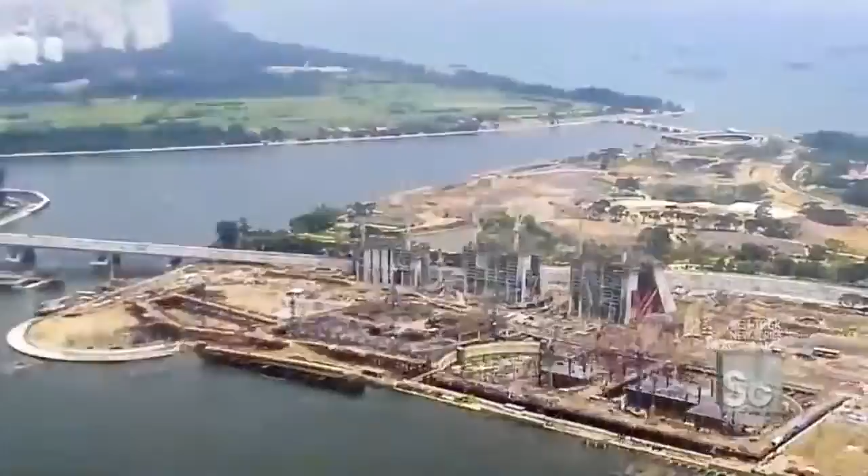With no natural resources of its own, Singapore is risking $5.5 billion in hopes of cashing in on the gambling boom exploding across Asia. It's a pretty significant gamble because for Singapore, you've never had gaming before at this scale. You've never had a resort at this scale. Yes. You're taking a kind of a major leap. Yes, it's certainly a transformational project for Singapore. Where you hope to actually not just double, but triple the tourism receipts. That's big.

The centerpiece of this giant transformation, the Marina Bay Sands. One of the biggest and most expensive casino complexes in the world. Unlike any hotel and casino ever built. Rather than just being kind of a traditional hotel and casino that we might find in Vegas, instead, we have a museum, you have theaters, you have retail, you have a casino, massive convention center, 3 incredible hotels, and all of that capped by the first ever Sky Park. That is absolutely right. The Sky Park on the very top will become the icon of Singapore, we think.

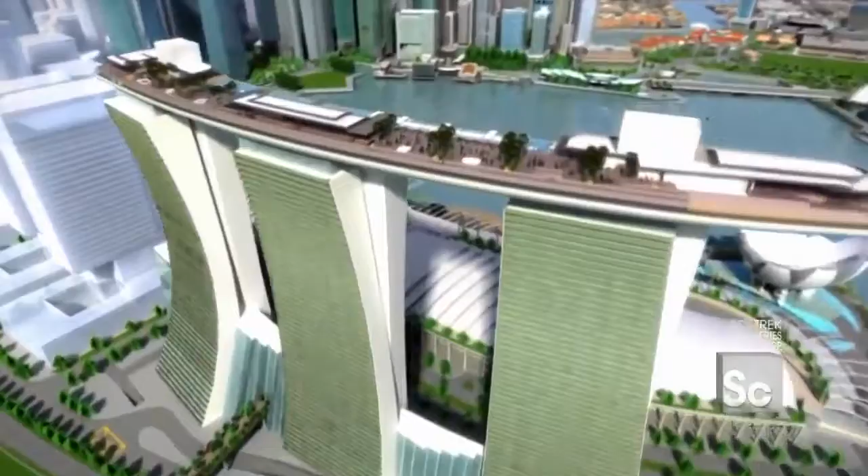In a move that has never been done before, world-famous architect Moshe Safdie put a park across the top of 3 massive skyscrapers. An 1,100-foot-long urban oasis with tropical gardens and one of the longest swimming pools on Earth. All of it perched 55 stories above the ground.

So, Brendan, how do you describe a Sky Park to people? I mean, it's just a fantastic structure. I've never seen anything like it. There's 3 55-story towers, and you're putting a piece of steelwork the size of an aircraft carrier on top of it. So it's quite a feat. And there's a park up there. There is. Well, there's more than that. There's observation decks and swimming pools and restaurants and all sorts of things. So it'll be a little city in itself.

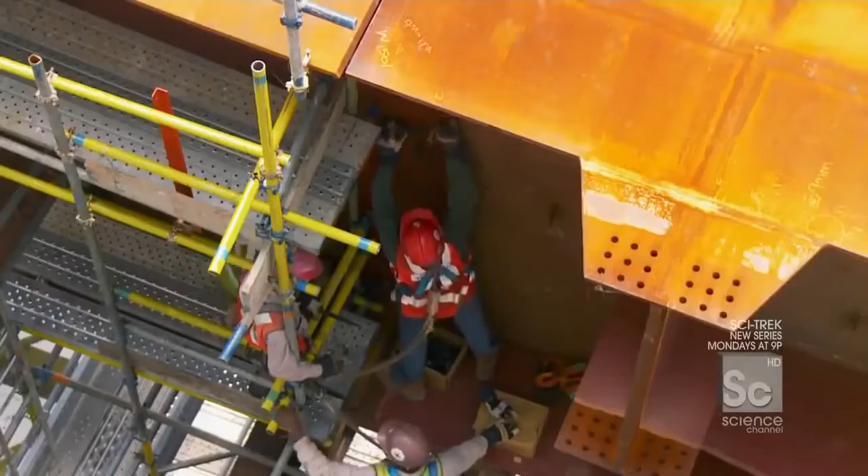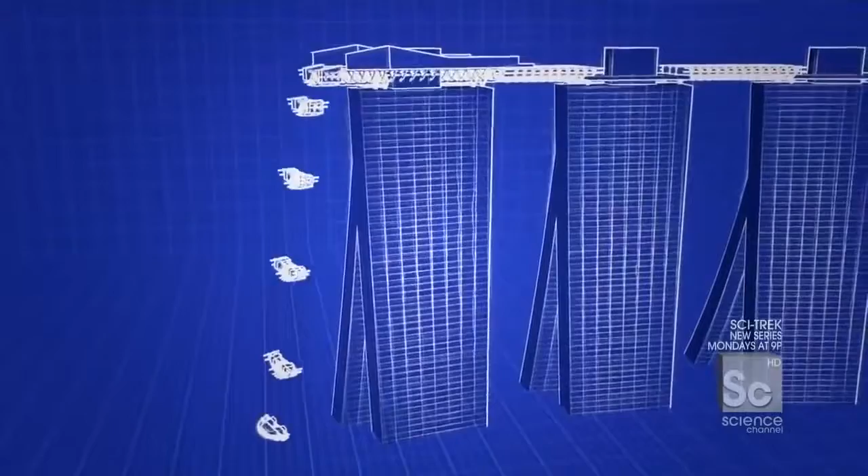The biggest challenge for builders, lifting 7,000 tons of steel, which is more than the main span of the Brooklyn Bridge, on top of 3 650-foot-tall buildings. To get it up there, the team divided the structure into 14 large but more manageable segments. 6 form the bridges connecting the towers, and the other 8 make up the observation deck, which sticks out 218 feet from the end. And right now, crews are about to lift the second-to-last bridge segment, a massive 350-ton piece that will hang between towers 2 and 3.

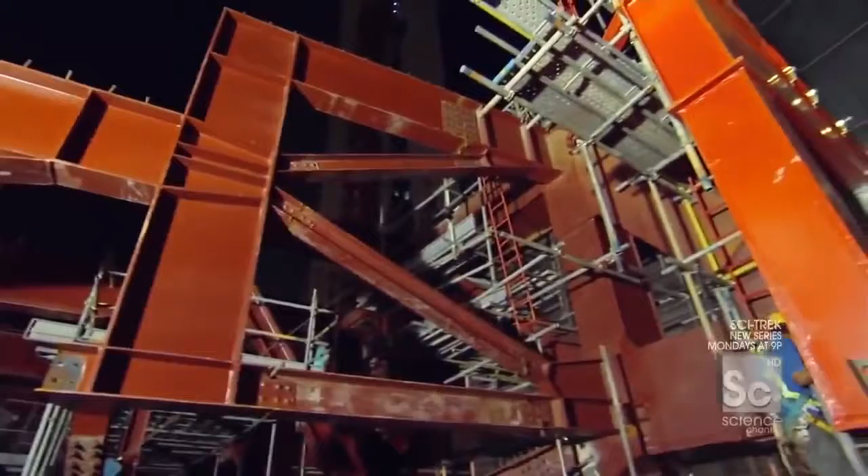It's a little after 7 p.m., and on most job sites, it'd be quitting time, right? Folks would be going home. But here in Singapore, we're about to begin one of the most critical lifts in the entire project. That bridge segment right there, an over 350-ton chunk of steel, is about to get lifted up over 650 feet in the air.

I mean, in principle, this sounds crazy, right? Yes. We're actually taking a bridge, lifting it up, and putting it on top of 2 skyscrapers. Yes. This has never been done. Never done. So you got to be a little bit nervous to get this thing up. Oh, definitely. We have to get it right. Lifting this piece will take some of the strongest hoisting cables ever designed. Going up? All right, Solomon, up here? Yep. They get attached to the very top of the segment, 5 stories up.

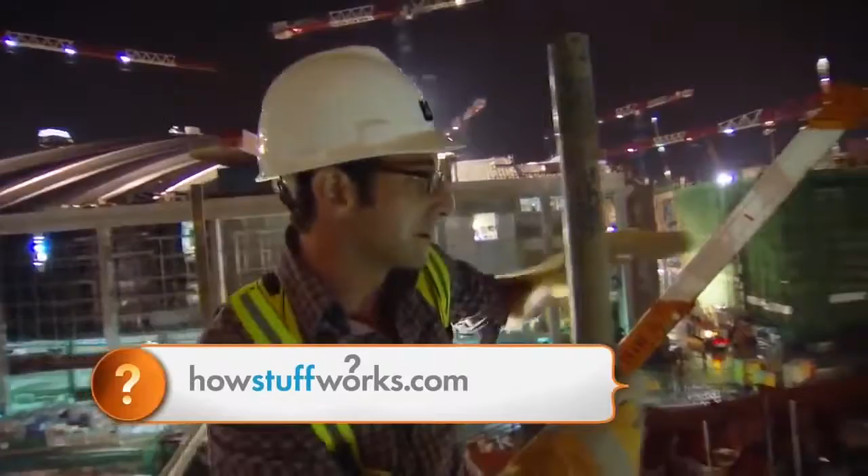All right. And now, at long last, I'm on the top of the whole bridge segment, and you really get a sense of its length, because look at that. It spans all the way out between 2 full towers, over 150 feet long. And here, this is what it's all about. This is the shackle coming down over 600 feet up. And to really get that point, come here, check this out. Look at the amount of bound cables inside of this thing. Just the density. It's two of these shackles, one on this side, one on that side. We're gonna lift up over 350 tons of steel.

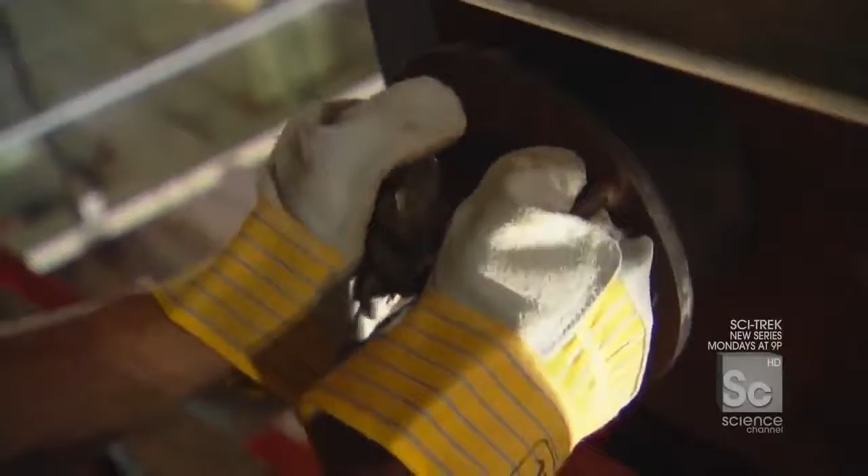All right, you call the man upstairs. An operator from the top of the sky park lowers the shackle down. Here she comes, here it is, here it is. Okay, 960 mm. It has to line up within 1/10 of an inch for this 150-pound anchor pin to fit through. Oh no. I'm stuck. Push. Fight, come on, shake it a little bit. Hammer! Give it to me, Poppy. Lock here. You ready? Here I come.

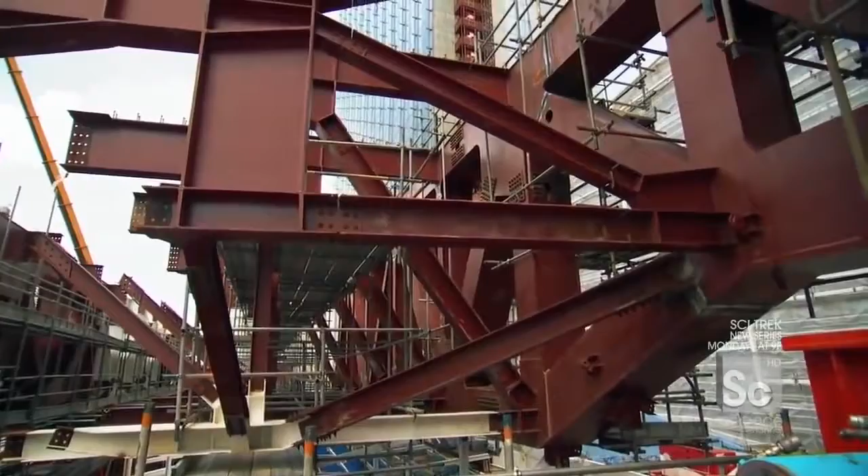Once the pins are pounded into place and the shackles are connected, there is one final step to make sure that the load is secure. Woo! Overnight, crews test the connections for 12 hours by hanging the segment just 4 inches above the support. If everything looks good, it is ready to go up. Okay, Solomon, she's floating. Yes. 4 inches off the ground. Ready for the lift? Yes.

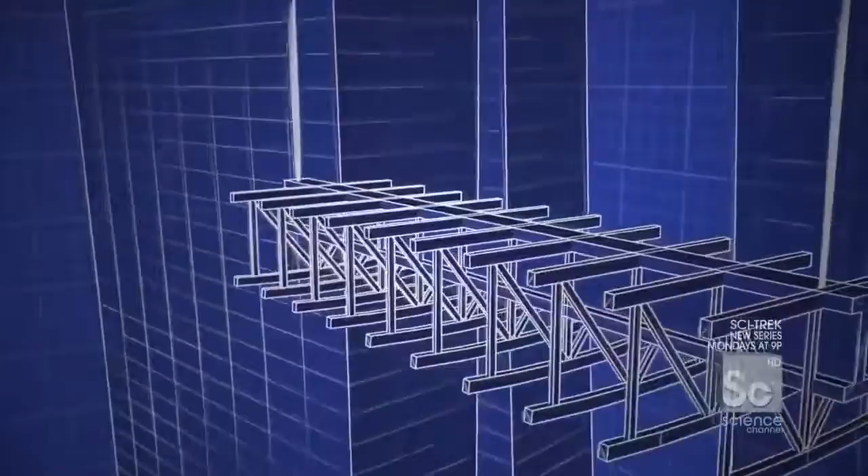How's the wind? If you can see, it is swinging. And if it swings, it might hit the building. So when the lift begins, the concern is in a strong wind, like a pendulum, it could move and actually hit the building. Yes. It's that close to the building? It is very close to the building. Because of the curvature of the towers, this piece must pass within 10 feet of 2 glass skyscrapers on its way up. Any wind over 5 miles per hour is enough to call off the lift. So are we good? Are we ready? Yeah, good. So it's now okay to go.

Okay, I'm ready. Typically, crews would use tower cranes for heavy lifts, but this segment far exceeds their capacity. So instead, engineers are borrowing the technology from a different kind of construction: bridge building. Even the most powerful tower crane can lift about 20 tons. This thing weighs over 360, not an option. So they went with something called a strand jack. And to understand how it works, imagine 2 hands or clamps holding a rope. One hand locks the rope, the other brings the rope up, grabs the rope, goes back for more, brings up more rope, and so on and so forth.

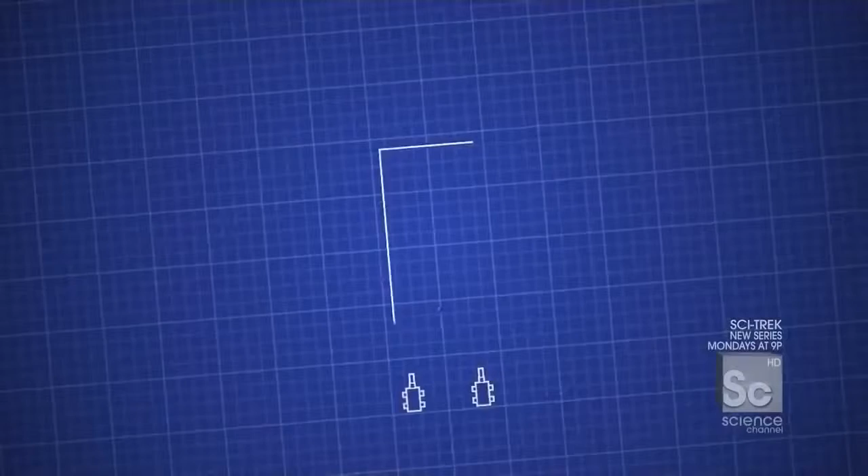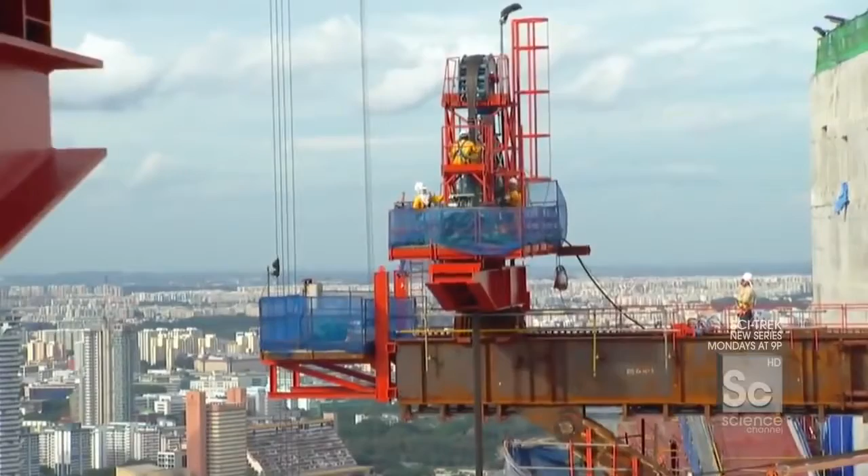Strand jacks work on simple hydraulics. A bundle of 22 half-inch diameter cables passes through 2 clamps. The top clamp grips the strands and moves up almost 2 feet. Then, the bottom clamp locks the cables in place while the top moves back down for the next pull-up. It takes 2 enormous strand jacks to lift this segment, one on each tower. Combined, they could lift the Statue of Liberty. It's the first time that this technology has been used to make lifts this heavy from the top of a skyscraper.

Tony? Danny. Welcome, Danny. Good to meet you. Good to meet you.

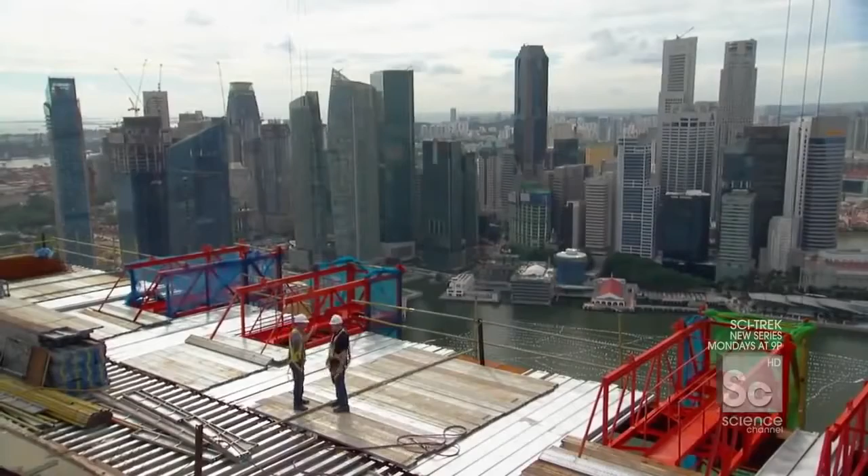Tony, where am I standing right now? Well, you're on the Sky Park. So this is kind of where the action is. This is where the pool is. Yep. Right where we are now is the second swimming pool. We're actually in the pool right now. We're in the pool. This is the view from the pool. Oh my God. People will be able to swim out to the edge of the pool. Yep. And literally, there'll be no edge, right? It'll be an infinity edge. It'll be an infinity edge looking out over Singapore. Wow. It's pretty spectacular. That is amazing.

And what's making all of this happen is this really just nasty looking beam. That's right. So this enormous frame is supporting the strand jacking units. Now, can we actually head up top to the strand jack? Yeah, we can. Let's go this way. The strand jack sits on a temporary support structure that extends 30 feet out from the side of the tower. Tony, where we're walking right now, we're actually leaving the skyscraper below us and now heading out. We've just walked off the edge of the building. Beyond. So we're now standing perched out. There's no more skyscraper below us right now. There's no building below us.

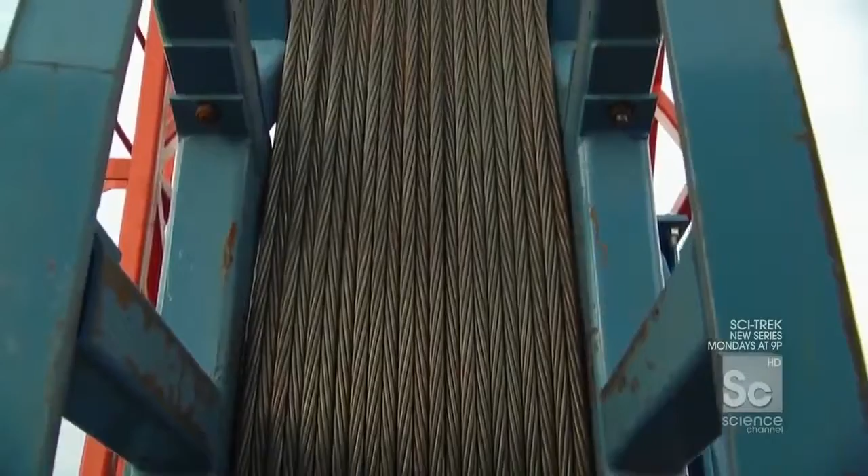It's awkward. It takes almost 30,000 feet of cables to raise the segment, enough to cross the width of Manhattan. And if any of them get tangled, workers cannot lower the piece back down. So one of the most critical jobs on the site falls to the cable manning crew here at the highest point of the sky park.

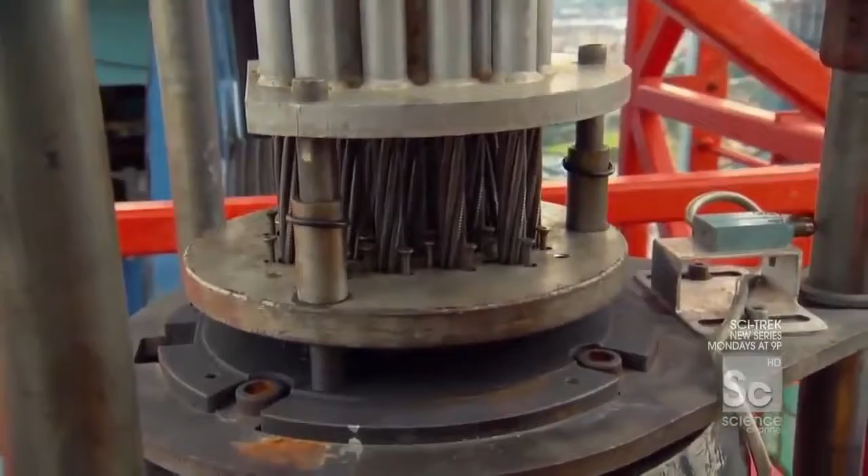Okay, so I am now standing at the very top of the strand jack. And you know that because right here, this is it. This is the top of the cables. And what we're about to do, every 30 strokes, they stop everything, clamp the lift, and spray some lubricant inside to make sure everything moves real freely. Unfortunately, I'm getting tasked with that role right now, so what do you got, some WD-40 we're doing this with? Look at this guy. Why is this the most low-tech thing in the world?

Okay, so now what we've done is we've taken the collar off, we've lowered the jack down, now we've exposed the cables to give us good access for some good greasing. Okay, Romley, how do you grease it up? Spray and pull out. Put in, spray, pull out. Go in, spray, pull out.

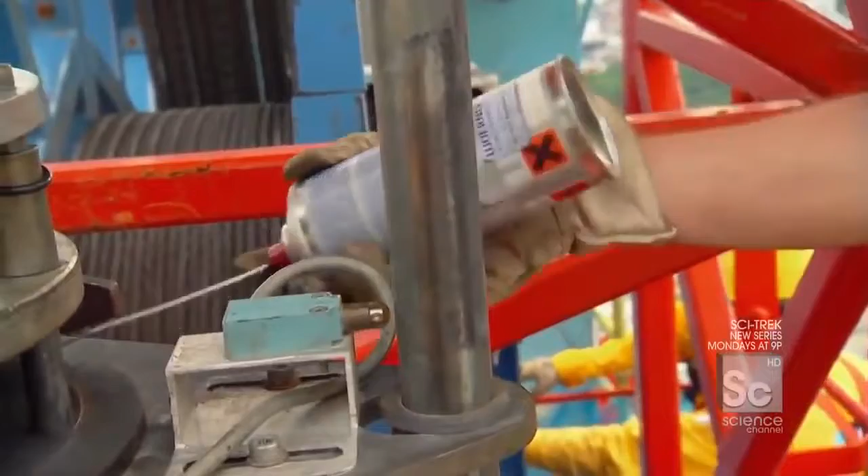You know, it's sort of humbling to have to climb up to this point, to have that behind you, to have to take a spray can like this, stick in, spray, pull out. Stick in, spray, pull out. These guys have to grease these cables once every hour for the entire night to get this segment up the final 500 feet to the very top of the Sky Park.

Coming up, a one-of-a-kind solution to fight Singapore's intense sun puts up a fight of its own. Hang on. Whoa. I'm gonna pull you right outside of the basket.

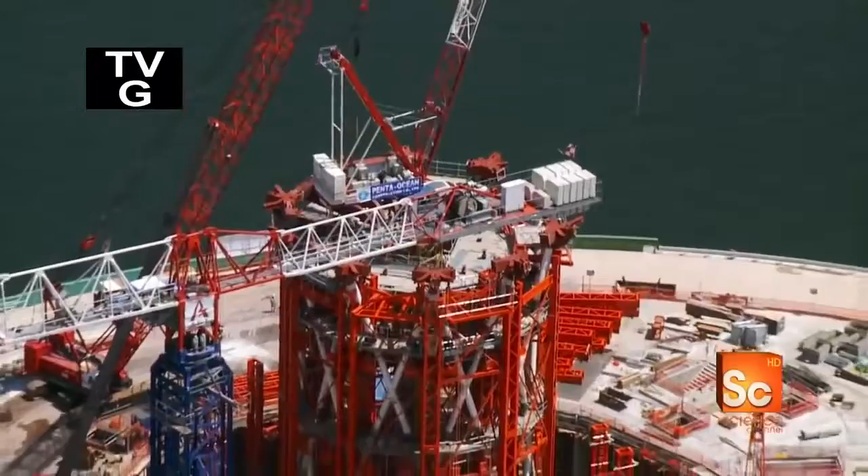Singapore is just 14 miles long. And with literally nowhere else to expand, this tiny island is increasing its footprint by actually filling in the sea, creating almost 1,000 acres of land on which to build an entirely new downtown.

So tell me something. If I were standing here 5 years ago, what would I have seen there? Well, 5 years ago, you wouldn't see the floating gallery, you wouldn't see the wheel, you wouldn't see Marina Bay Sands, neither would you see the financial center. So this is a radically different skyline in just 5 years' time.

Yes. Singapore's evolution involved 30 years of land reclamation, followed by 5 years of construction, all culminating with the Marina Bay Sands. So 5 years ago, this would have been called the old downtown of Singapore. Yeah. And now with the Marina Bay Sands completed, this becomes the new downtown. Yes, absolutely.

The Marina Bay Sands' 3 hotel towers will offer guests phenomenal views of Singapore's new downtown. But they also had to be a stunning centerpiece for the city's redevelopment. So, to define their curved silhouette, the architect clad the tower facades with 1,900 glass fins, which also perform a key functional role for the building.

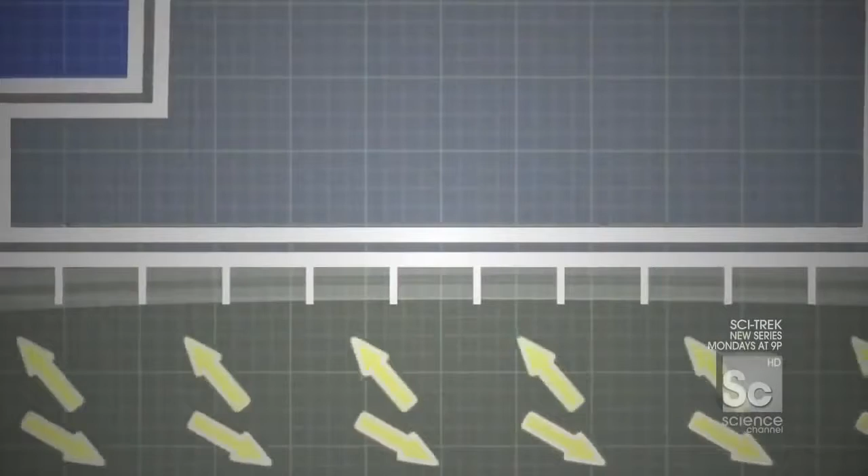The western face of the towers gets the most intense afternoon sun, so when the light hits the fins, they actually deflect the sun's rays, casting a shadow that reduces the heat on the hotel rooms by 20%, while still enabling clear views of the bay. But this distinctive design feature is also one of the most difficult to install.

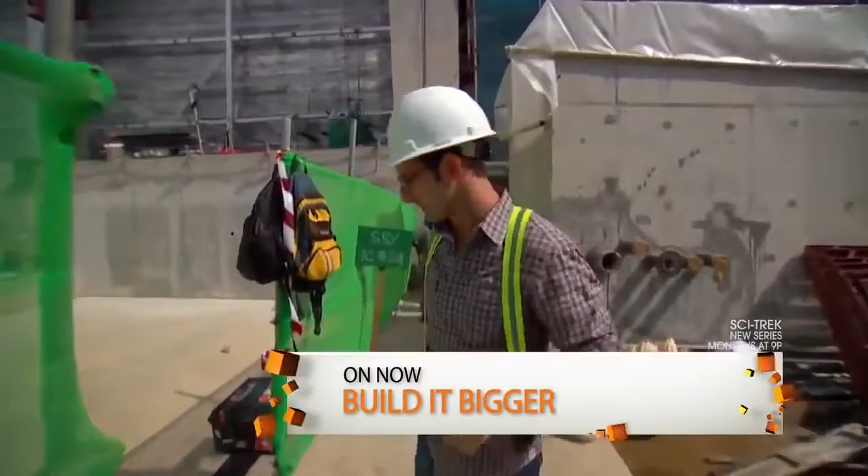I think today is gonna be one of those days where I go and do something that I kind of think I shouldn't do, but in the name of really understanding how it is they build this building, we're gonna do it anyway. I'm gonna take you in a gondola up the side of a building, almost 600 feet, to install glass fins. And the guys who are gonna help me do it are right here.

Terry? Hi, Danny. Good to see you. David, how are you? Danny, good. Not bad. What are we up to, fellas? We're actually going up to the top. Basically, we're going to install the last fins to Tower 1. And these fins are actually hanging perpendicular from the facade of the building.

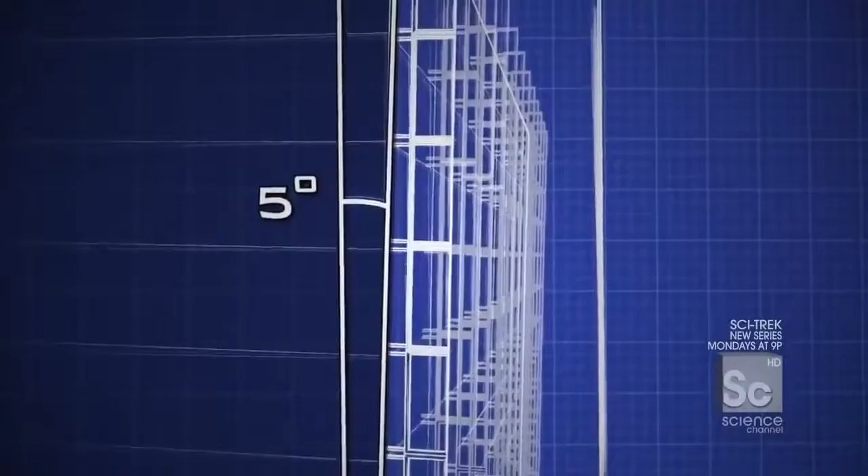That's correct. Each fin is 10 feet tall and weighs 400 pounds. They're hung in straight vertical lines, protruding up to 4 feet from the side of the tower. Because the facade actually curves outward 5 degrees at the top, there would not be enough clearance for the Sky Park lift to pass by. So 12 fins in the upper corners of each tower were left off until now.

So this is it. We are closing up the curtain wall of Tower 1. Yes. Big milestone. Big milestone. All right. Take me over to my maker. Let's do this. Okay, no problem. Lead the way.

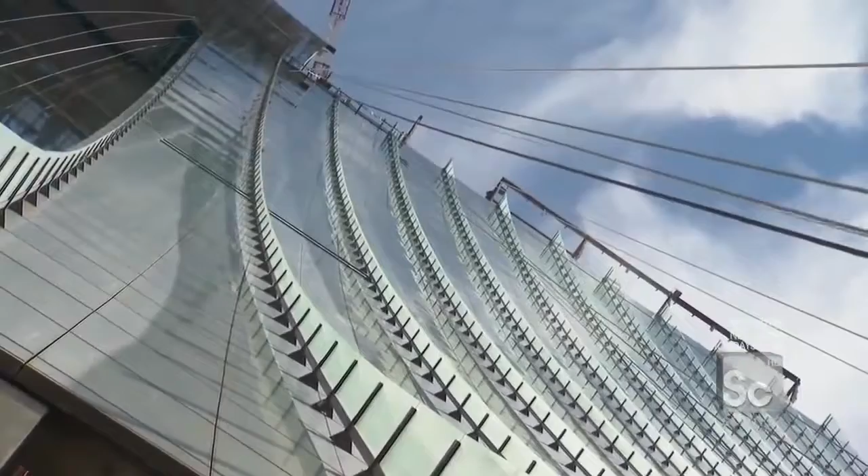Terry's crew installed the fins from a 6-foot-long gondola hanging off the side of the building. Okay. We doing? All right. You gotta be kidding me. It's basically the size of a bathtub, swinging from 2 sets of 650-foot-long cables tied to the tower. Show me the safety, please. It's so precarious that I'm going to be tied to a separate cable in case the main cable fails.

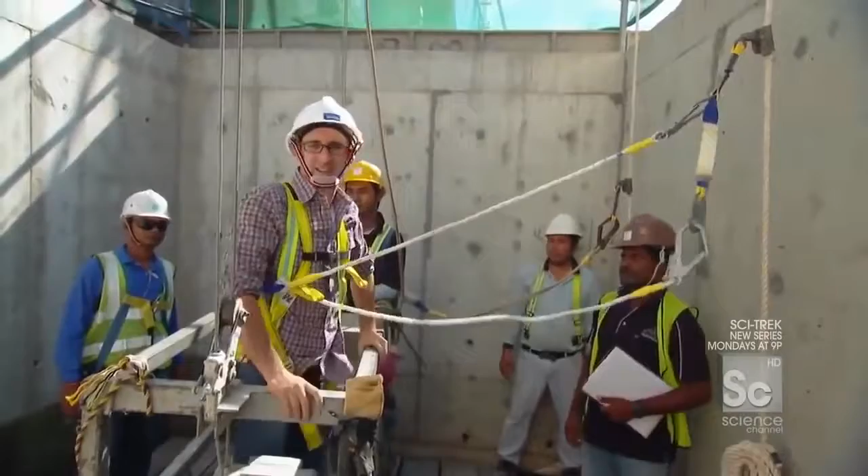Just gonna hang some glass with my boy Jay. 600 feet in the air. Right, man? Give me some skin. Buddy? We're gonna be great.

Yeah, here we go. The gondola travels at just 0.2 miles per hour. Here I come. Moving along, just moving along. So it'll take me more than a half hour to reach the top. Oh my God. This gondola looks like it was built by the Unabomber.

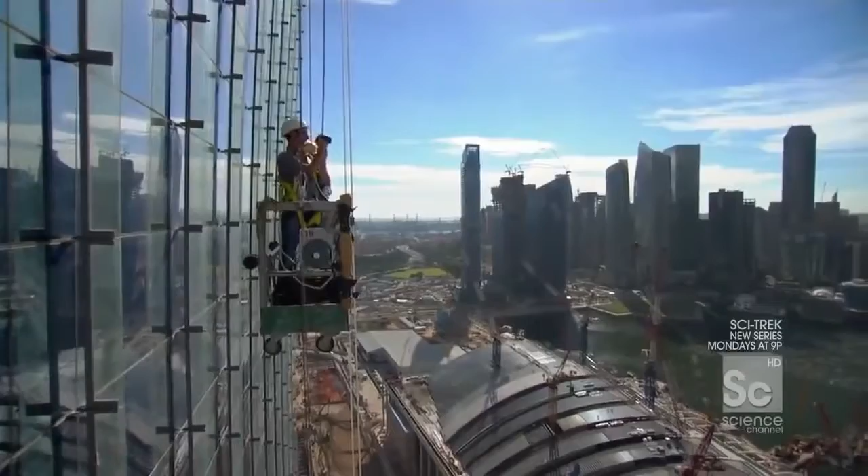Sometimes I don't really feel like I give you exactly what's going on for me right now, so I want to give you just a little taste of what I'm seeing. There is a fantastic view of Singapore. There is Jay, my chatty friend. And there is not a good situation.

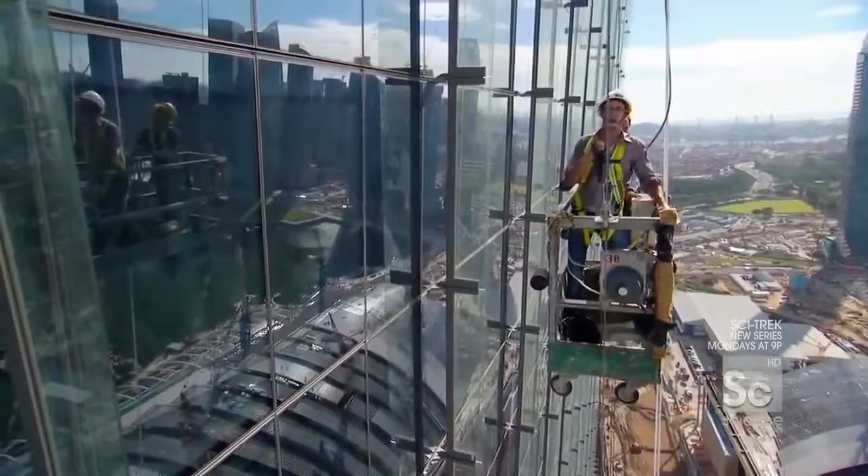All right, we're almost near the top, and you can tell because the building is beginning to bend back on itself and get closer to me. Right there, check it out, we're about 80 feet from the top of the building, and if you look up, you can actually see the missing glass panel. And as I approach the top of the skyscraper, they're prepping the glass. There she is. Oh, the wind is really moving up here.

That looks safe. Hey, fellas! How are you? How are you? Okay. Nice weather, huh?

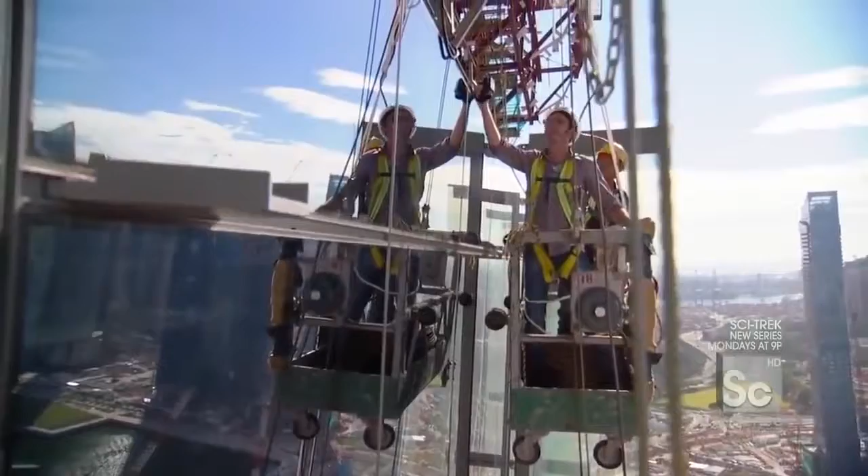Okay, this is something you don't see every day. I'm outside a skyscraper, and right here, right now, I am touching the top of the building. We are on top of the skyscraper. All right, who's ready to install some fins? Each fin is a custom-built pane of solid glass. I got the line. Hang on.

Look. On a calm day, they are extremely difficult to manage. The wind is blowing this thing out. Give me a hand, give me a hand. But on a day with even a light wind, the task is almost impossible. Hang on. You thought I was gonna pull you right outside of the basket. Hang on, give me some help. But I'm not kidding. Every time you get a little gust of wind, I can feel my feet getting pulled a little bit. There she is, slowing down.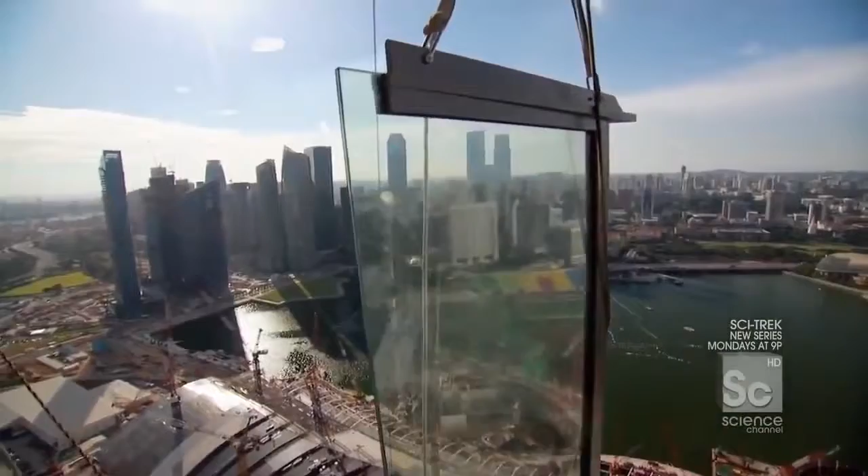It's basically like a big double laminated glass sail. And if the wind catches it, I mean, it moves. Okay, let it come down a little bit more. The fin can swing up to 20 feet while attached to the tower crane. Coming this way? Okay. Watch out, someone help him. Someone help him. That's just too dangerous for the final installation. So the team has to transfer it to a more precise chain block mid-air.

Whoa. Hold that side. Hold that side, please. All right, so this is it. What we're doing right now is essentially taking the load from the crane and transferring it to that chain block. Are we in? Okay, I think we're set. This is another one of these moments in my life where I say to myself as an architect, did you really need the fins? Did you have to have fins? Building would have been fine, you know?

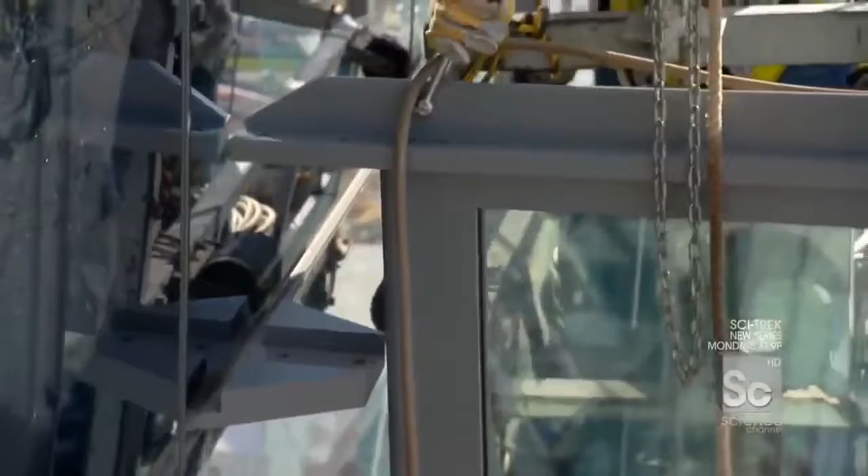Okay, gondola down. Yep. The fins are designed to clip into each other at the bottom. Any day now, Jay. But here, at the very top connection on the highest fin, it gets locked to the building with bolts. Oh boy, this is gonna be a nasty one. Okay, Jay. 4 bolts. Give me your thoughts. 1, 2, 3, 4. Are we good? Okay. Are we good?

Come here. Bring it in. I need some. Come on. Give me it. I need some. There it is. Okay. That's right. Whew. 4 bolts, locked in, lined up. We, Jay, are done. Can we go home? Home. That much he understands. Let's get out of here.

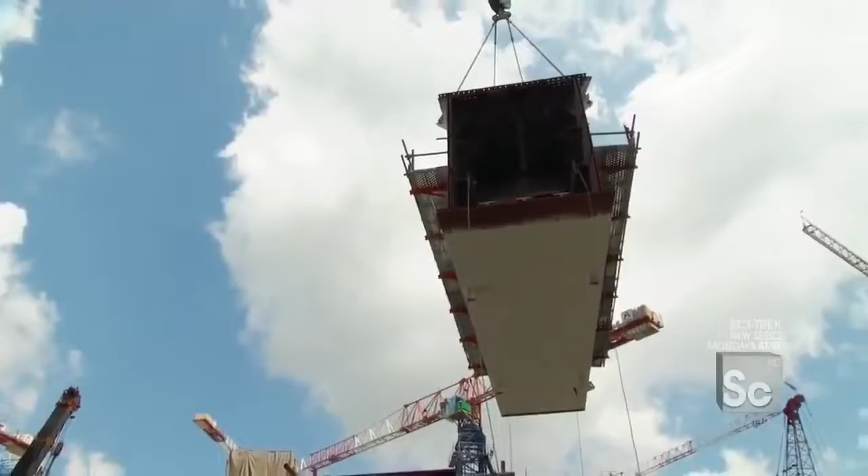Up next, building one of the longest and highest cantilevers in the world, jutting out more than 200 feet over nothing. Oh my God. That's enormous.

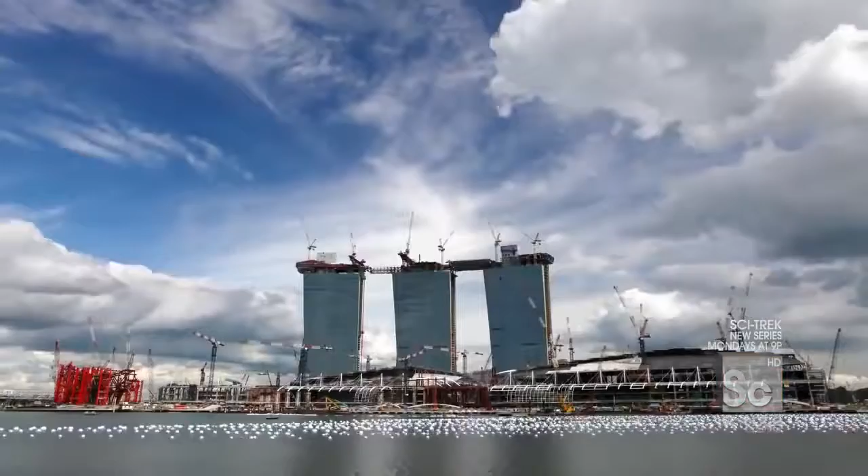Singapore's new Sky Park is the first of its kind. A steel structure longer than an aircraft carrier, on top of 3 skyscrapers taller than the Seattle Space Needle. And on the northern end, the architect took this innovation one step further, creating the longest cantilevered observation deck in the world. It's the biggest and heaviest section of the Sky Park, and it hangs out 200 feet over thin air.

When it's done, the Sky Park is going to look to the eye like one 1,100-foot-long continuous element. But the reality is, it's actually made up of 2 very different structural conditions. Bridges on the one hand, and something called a cantilever on the other. Spanning between towers 1 and 2 and towers 2 and 3 are 2 bridges, basically acting like tabletops. The force goes from the bridge, transfers into the towers, and down something called shear walls into the foundation.

Now, the cantilever is a different story. A cantilever, by definition, is a load supported on only one side. So what you have here is a 218-foot-long span, almost like a diving board, perched out over nothing. Intuitively, that load wants to just twist off the building. So to keep it down, they've put not one, but two 700-ton backspans holding down the cantilever.

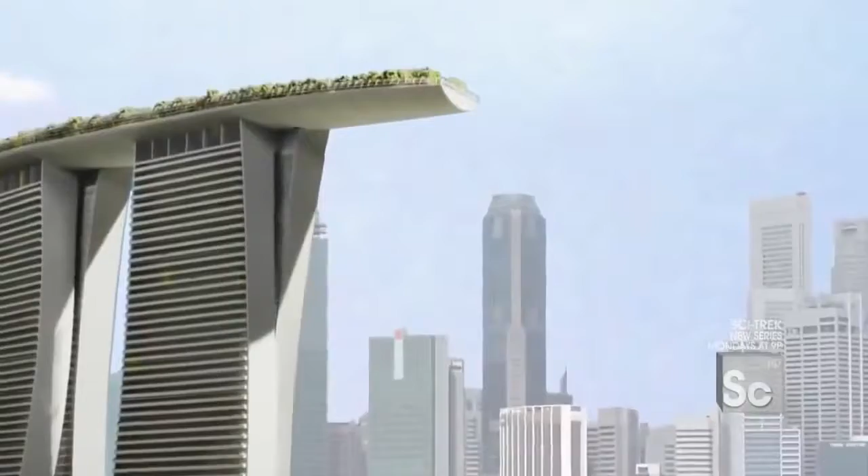The two backspans weigh as much as a fully loaded freight train, but that weight is critical to balancing out the cantilever, which will jut out longer than a 747 from the end of Tower 3. There are 860 tons of structural steel that make up the 218-foot-long enormous cantilever.

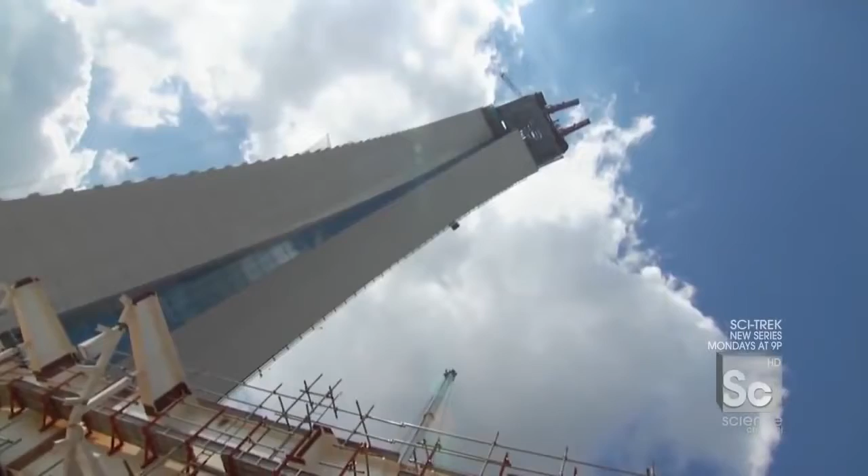It is so big that they actually assemble the entire unit here on the ground before sending it all the way up there. The cantilever is just too big to be raised in one single lift. Instead, it's divided into 6 segments. Once they're 650 feet in the air, crews will have just one shot to fit them together. So before the segments can be lifted, they're assembled on the ground to be sure that each connection will fit perfectly.

So these pieces behind me represent the very final pieces of the cantilever to be assembled here on the ground. So once we get this and this bolted onto that massive cantilever, the lifts can begin. So the crane's now setting the shackles up. We're going to go on top of the piece to connect it. The piece we're attaching today is 12 feet tall.

Come on, jungle gym style, baby.

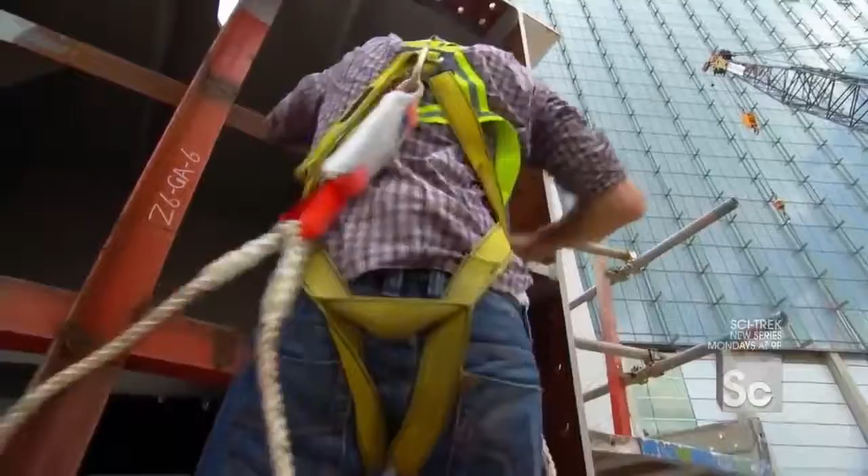And it weighs 30 tons, as much as 2 Mack trucks. A crane will lift it over to the rest of the cantilever using 4 extra-large shackles. So Viram's now tightening up this shackle. So shackle number 1, 2, 3, and 4 are all connected. The next step is to take the piece that I'm standing on, lift it up, and extend that cantilever another 50 feet.

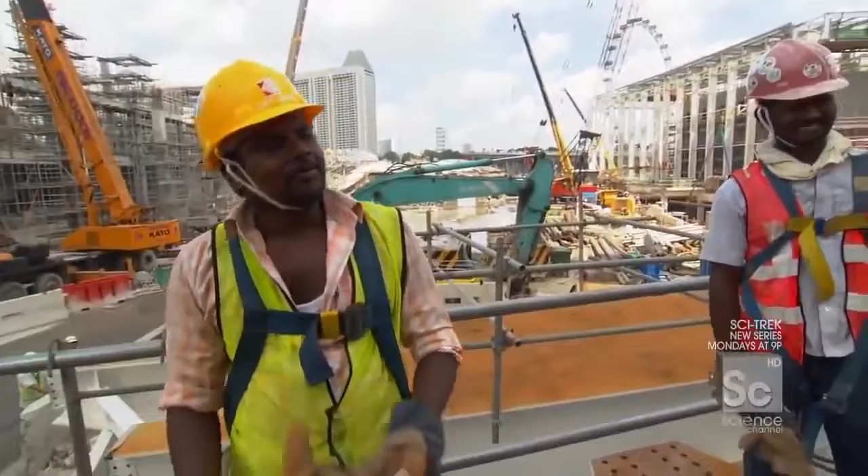You ready? Knuckles? Knuckles! All right. You ready, Knuckle Man? Knuckle Monster, you got it. Nux Magoo, come over here for that. Bang! We are ready to go. Okay, I'm ready.

So what they've done is they've just put a bit of tension in the line, lift the piece just off the ground to make sure the shackles look nice, and they know where the center of gravity is. So are we good? Are we ready? Yeah. All right, let's go. She's off. Out of our hands. Now the crane's got her. He's gonna swing her all the way around this way. What's really worth noting is as you look at this massive floating piece of steel, it's but a small fraction of the entire cantilever that's going up there.

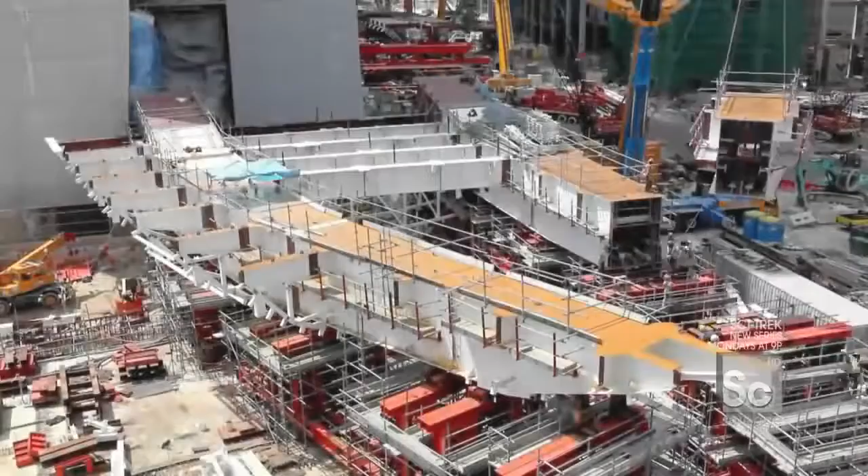Even with 1.5 million pounds of steel, this cantilever will still be susceptible to the problem facing all structures: movement. All buildings, all bridges, even all cantilevers have a natural frequency, meaning they move ever so slightly. Now, if the movement of wind, or the movement of people even, starts to align with that building's movement, it can combine and literally shake a building. So when the engineers were designing the cantilever, they had to be concerned with not just how many people stood on the edge, but also how they were moving.

This cantilever has been designed to withstand wind and earthquakes, but its most dangerous threat could come at the hands of a DJ. Yeah, it's thousands of tons of structure up there, so you and me jumping about, it's not going to do very much. But if you get 100, 200 people all jumping up and down at the same frequency, then it can actually excite the cantilever and you actually start to feel it. Right. It would take hundreds of people dancing to the exact same motion. Like the Macarena. Yes, that's right.

And believe it or not, our dynamics engineers have iPods with thousands of songs in them that actually have the frequencies of all of these songs. So once we find out what the frequency is, in theory, you can say you can dance the Macarena, but you can't dance the bus stop or whatever else. That can't be true. Is that true? Yeah, that's right. So you're telling me that some engineer is doing intense load calculations and solving the fact that this thing can take the electric slide, but it cannot take the achy breaky heart. And they know that in advance, and it's been designed.

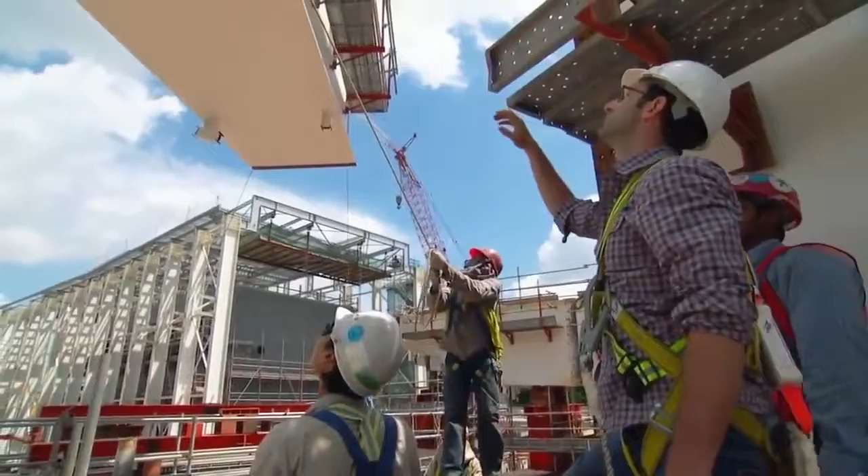Now that the piece has made its way over to the rest of the cantilever, the next major challenge is lining this giant segment up for attachment. So the piece is now literally sitting right on top of my head. And just imagine, on top of this incredible white long piece of steel will soon be a garden, a pool, and a dance party.

Slowly got it down. What's incredible about lifts like these is that the first 99% happens almost instantly, and now it gets down to the details. Pushing it, pulling it a matter of inches, to get all of these holes lined up, to get the bolts in, and take the load off the crane.

Once the piece is in place, the crews have to line up all 1,500 bolt holes. There are so many bolt holes. They'll connect about a third of them here on the ground to make sure everything fits together before liftoff. Because there are no second chances once this piece is airborne.

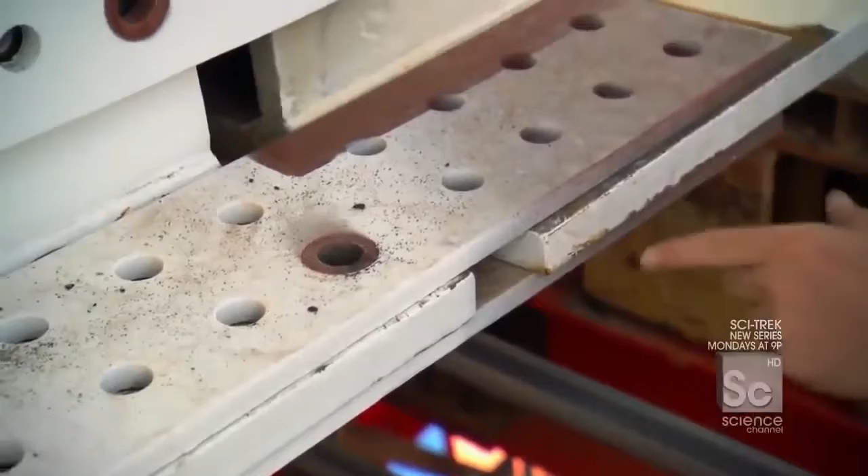So this is how one fits into the next piece right here. You have these two plates on top, and they're sliding over top of the previous cantilever piece. Here it is, it's coming in, it's coming in. Once she's there, we'll put this pin in to lock the piece together so we can release the crane and move on. About 2 inches.

Just about there, just about there. Okay? Yeah. Use the hammer. The pin secures this new piece to the rest of the cantilever, so bolting can begin.

Man, I never do that. Usually I like break a finger and knock some steel off the thing and almost break the hammer most of the time. I knocked the crap out of that thing.

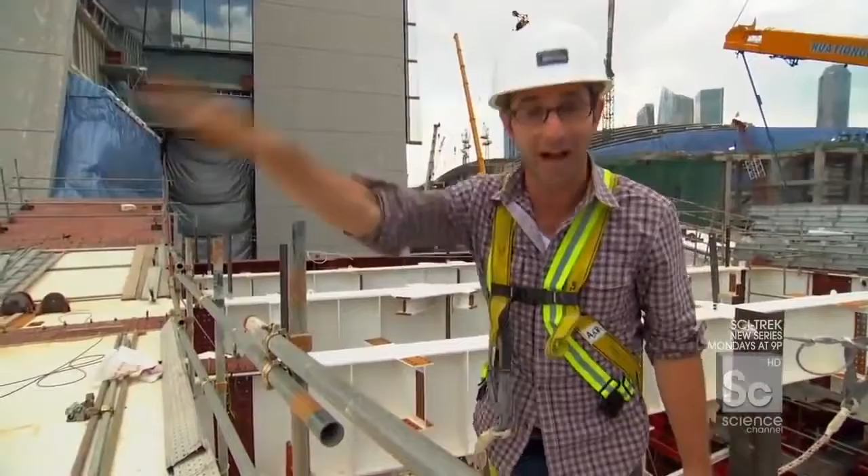Well, as you can see, the piece is in its final location. And now from where I'm standing, I think you can really get what this thing is. An 860-ton, 218-foot-long steel diving board that's going to be perched out over 600 feet in the air.

And coming up, a hotel like no other, with a lobby bigger than a cruise ship, wrapped in glass. This is probably one of the most spectacular corridors I've ever seen. Correct. But first, what is the maximum number of people the Sky Park can safely hold at one time? The answer after the break.

The answer to the trivia question. 3,900 people can safely be on top of the Sky Park, but only 900 of them can be on the cantilever.

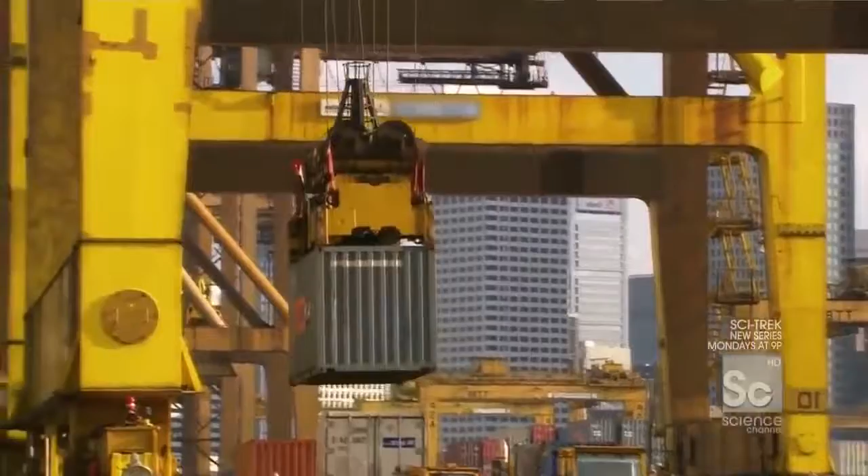Singapore is the gateway to Southeast Asia. And for the past century, its economy has depended on its location as one of the world's busiest shipping ports. But this city is in the midst of a makeover. When the Marina Bay Sands opens later this year, Singapore will instantly become one of the largest gaming markets in the world, putting it in the same league as Las Vegas, Atlantic City, and Macau.

When Macau opened their casinos, they looked to the past for inspiration. You have the Venetian in Las Vegas, you have the Venetian in Macau. Carbon copy, only bigger. But here in Singapore, a country so focused on image, they didn't want to mimic what came before them, but instead, they're trying to literally reinvent the idea of a hotel casino. The difference comes down to design.

The typical casino model involves a giant gaming floor with a flashy attraction out front and a hotel connected in the back. But with the Marina Bay Sands, the architect actually separated the hotel from the casino and relocated the attraction on top in the form of a sky park.

From my perspective, when I think of a hotel and a casino, I think of a ginormous casino, a tall hotel in the back, and basically not being able to check in and go to my room without passing a blackjack table or a slot machine. This doesn't follow that model. It does not. Singapore has a very particular vision as to how they want the gaming component to work.

What we built here was not something that was casino focused. It was all of this. So the casino is part of something far grander. And key to making that happen is not just building a set of normal, typical, expected structures, but instead to do something like that. Correct.

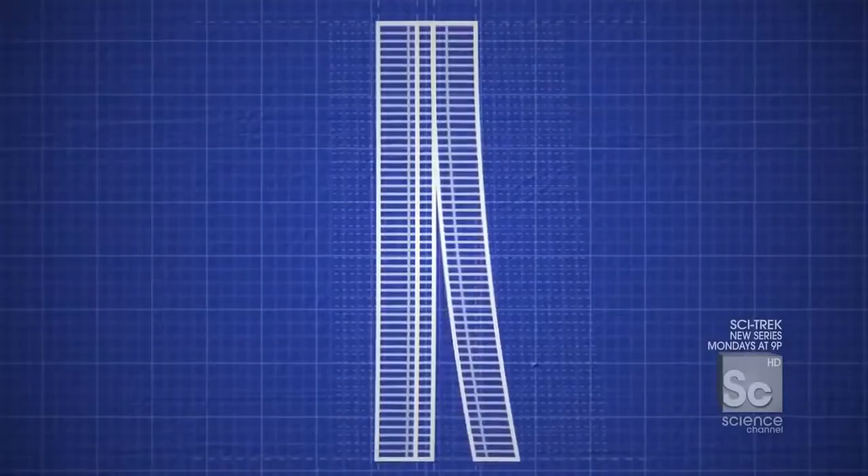This revolutionary design carries over to the hotel towers themselves. To create a hotel lobby like nothing before, the architect actually split each building apart for the bottom floors, creating one long tapered space linking the three separate towers together. The three hotel towers are all connected by one long continuous atrium. And that atrium is covered in glass.

These massive 9-foot-long panels that we're about to take from down here and install right up there. 3,500 individual panels will hang throughout the atrium, transforming this space into one 850-foot-long tube of daylight.

So Terry, once the scaffolding comes down behind that glass, this whole chamber is going to be just awash in light. Yes, that's correct. And these spaces literally link all three hotel towers and let you look from one end of the building all the way down to the far end. That's correct. So this is more than just a kind of connective hallway from one hotel to the next. It's not just a corridor. This is not a corridor. No.

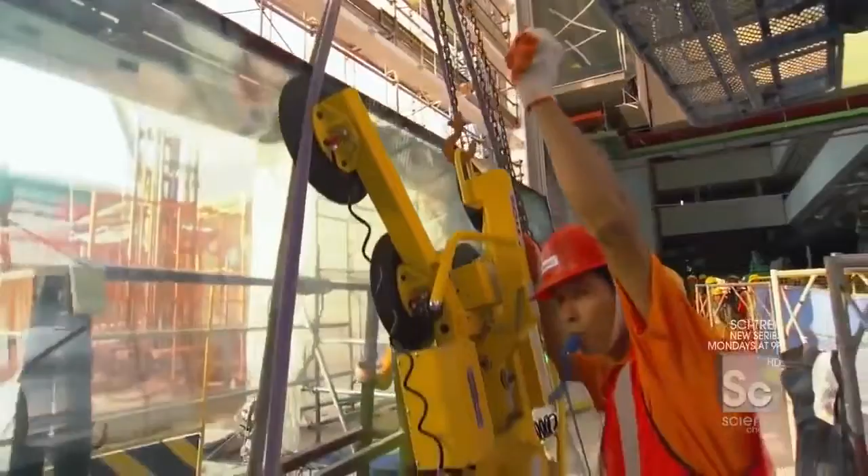And if it is, it's probably one of the most spectacular corridors I've ever seen. Correct. The atrium glass is a key part of the tower design, but it also plays an important functional role in sealing up the building. With hotel guests arriving in just 6 months, the delicate job of hanging all that glass needs to happen quickly.

Now, why is it so important to get the glass on the atrium and button up the facade? The vital bit is we actually have to make the building watertight as quickly as possible to enable all the final finishes to commence on the inside. So all the sheetrocking, carpeting, wallpaper, painting, that sort of stuff can't happen if moisture can still penetrate the building. That's correct, yes. So today we are going to be headed, where, up there? We're going up to the top and we'll be installing the top piece of the glass. So we have a big task ahead of us.

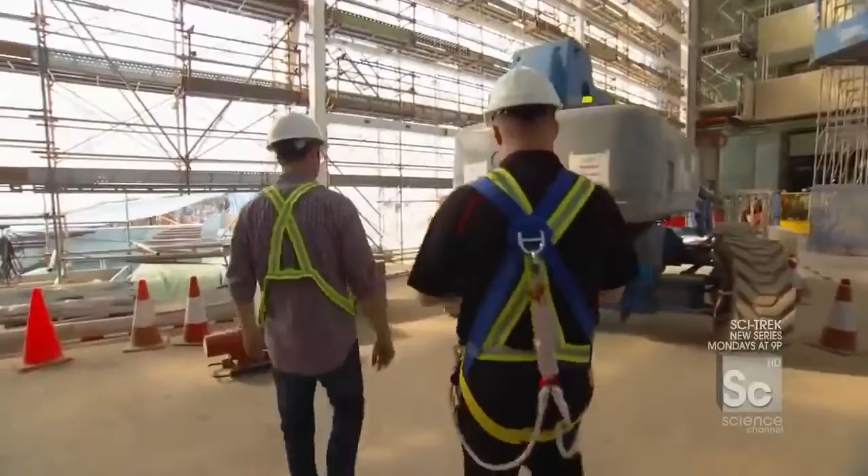To finish the atrium on schedule, Terry's team has to install 200 panels a day, about 5 every half hour. So here the guys are, they're just getting the glass ready. A task requiring 8 international teams of glazing specialists. Hello, sir. I'm Y.

Y? Nice to meet you. Nice to meet you. So Y, you're one of the installers? Yes. And you've been installing glass how long? Over 10 years. My experience is over 10 years. Your experience is over 10 years. My experience is almost 10 minutes. 10 minutes? So this is going to be a very good team. You and me together. Master and apprentice. Are you ready? I am ready. Let's do this. Let's hang some glass. Y and Danny? Why? Because they said so.

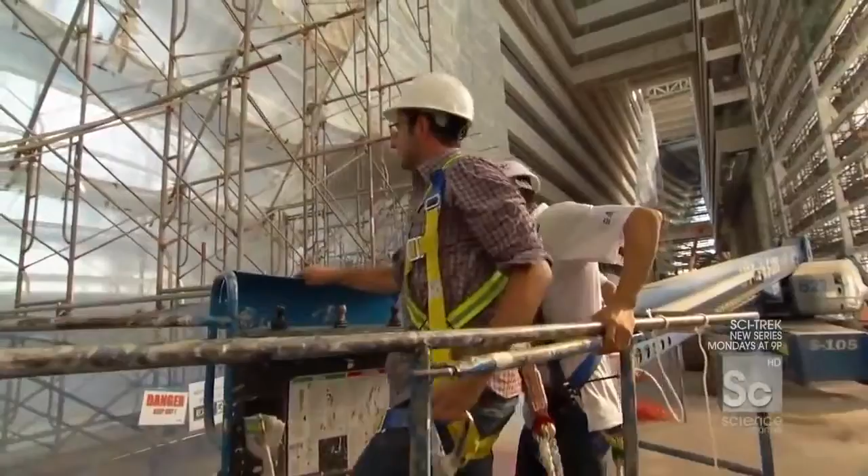Let's do it, Y. We're installing the 3rd highest panel in this section of the atrium, more than 100 feet from the ground. Safety harness? I want you to be safe the whole time. In addition to Y and me, it'll take 10 other workers to install this 550-pound panel. The crew on the ground applies suction cups to the glass and then sends it up on an electric hoist to meet the crew in the air. Here it comes, check it out.

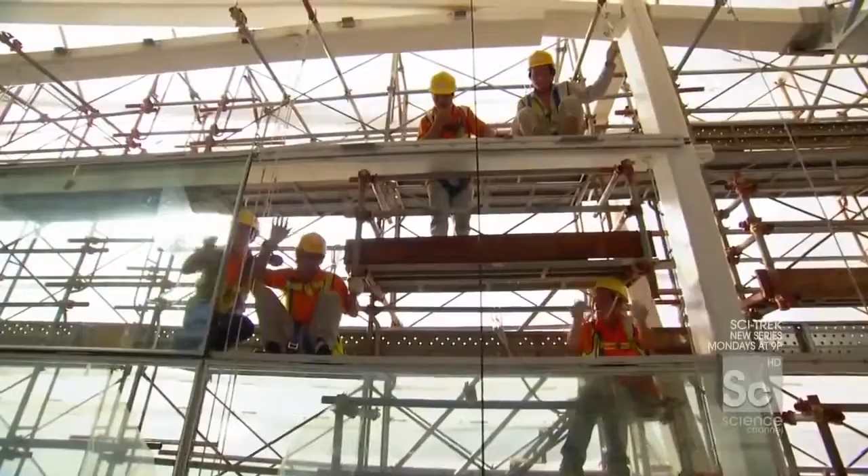And waiting for me, hello, my brothers! You guys ready to rock and roll with myself and Y? Ready? The big team. This is it. This is the Singapore Glass Stallions. All right, here it comes. It's a big piece of glass, huh?

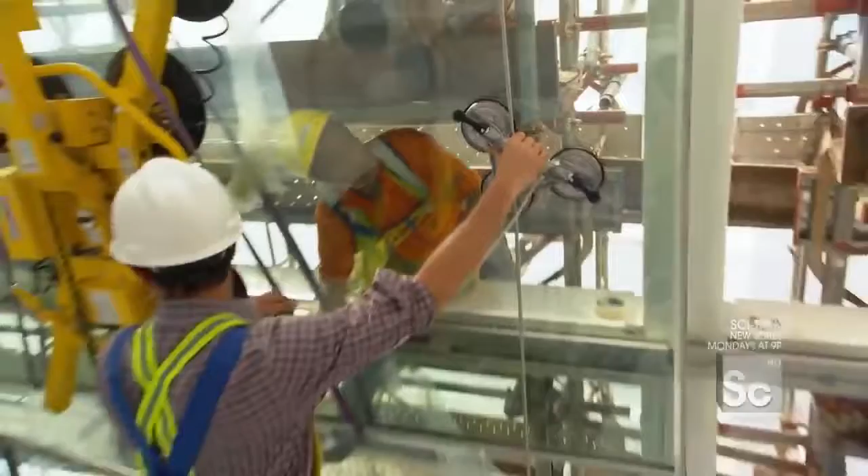Y? What are we doing? What's the first step? The first step is we need to take off the handle. So I'll take off that side, you take off that side? Yeah, take off only the handle. Turn only. All right, I don't want to drop it, though. Don't want to drop it. The panel is supported by a backup system of smaller suction cups to help guide the piece on its way. Okay, guys. Let go? No, it's too scary. I'm not going to do it.

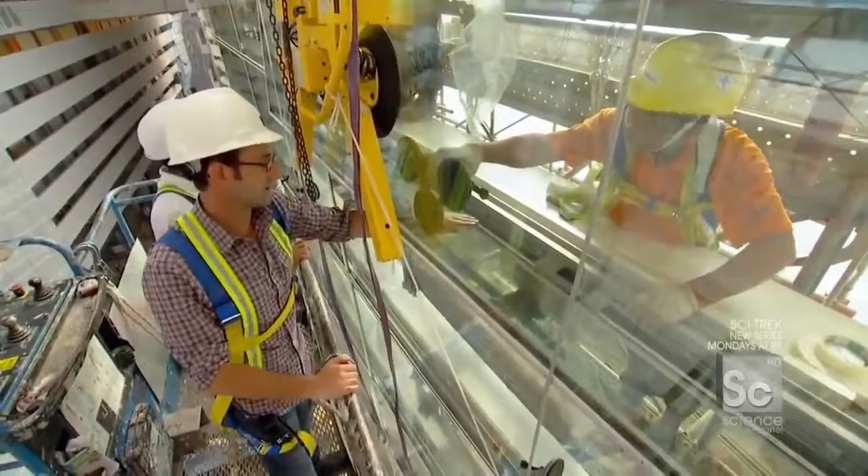Okay, I did it. And just like the glass fins outside of the towers, we'll finish maneuvering this panel into place with the chain block. Okay, so the chain block has lifted the glass panel to just about the height, as you can see, of the previous panel. So the next step is to push it in and get it locked into place on the brackets. Okay, Y? Should we bring her in?

Last one. The interior work for the hotel cannot get started until all the atrium glass is hung and the lobby is watertight. I'm pushing, Y. So to speed up that process, 20 attachment brackets come pre-installed on the atrium wall frame. They sit horizontally so the glass can slide into place. There we go. And then we'll turn them vertically to lock the panel to the building. Do I need the screwdriver? No, you use the power tools. I'm old school, Y.

You make sure all the pressure bars must be tight because the hand power is not standard. You haven't seen my hand power, Y. It's tight. Check it, Y. If you don't trust me, check it. You have a look. That's just good stuff. Good. Very good.

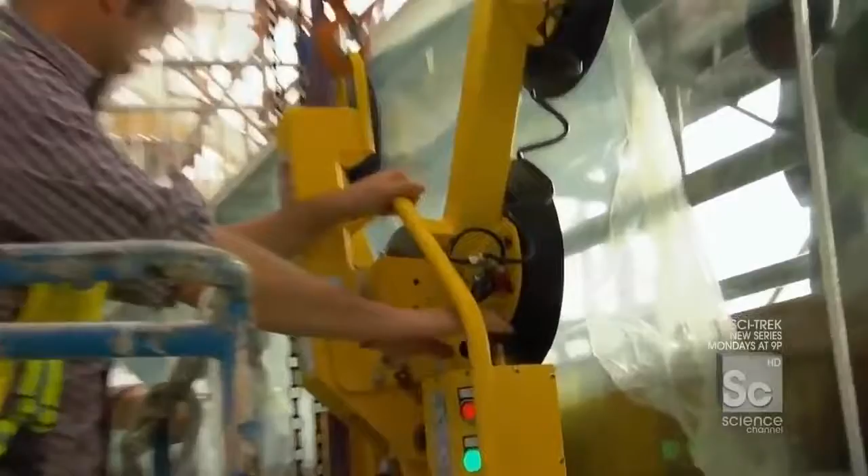All four sides are locked into place, and this glass panel is now fully supported by the building. So therefore, Y, I'm pulling the plug. Suction is coming off. 3, 2, 1. All right. Very nice. Look at that. Very nice. Y from Malaysia and his team do this 25 times a day. Best partner. And in just 6 months' time, this entire atrium will be covered in glass and shimmering with natural daylight.

It's you and me. Go home. Now go home. And by go home, I mean hang glass the rest of the day.

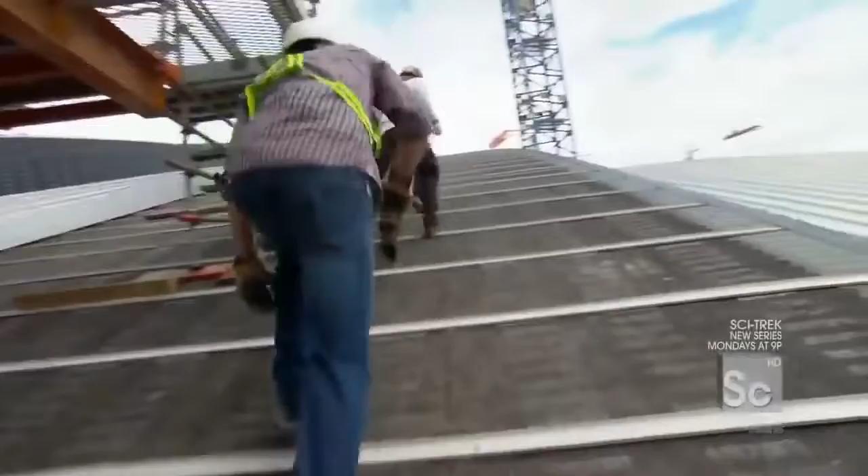Up next, racing to finish one of the largest paint jobs in the world. We're going to use a brush. This brush.

After 30 years, Singapore's ambitious downtown redevelopment is nearly complete. Its crown jewel, the $5.5 billion Marina Bay Sands, is due to open in just 6 months. And crews are racing to complete the hotel's complex facade. The glass on the face of the towers is complete, but on the side walls, the concrete remains exposed. So to finish those walls on time, there's another massive job ahead.

When you clad the outside of a skyscraper, typically you cover it in maybe some stone veneer, maybe some glass, or maybe some metal paneling. What you don't do is paint it, right? Because if you've ever painted a fence, every couple of years you have to repaint that fence. But here in Singapore, they're so focused on things being clean, so focused on the immaculate maintenance, they're willing to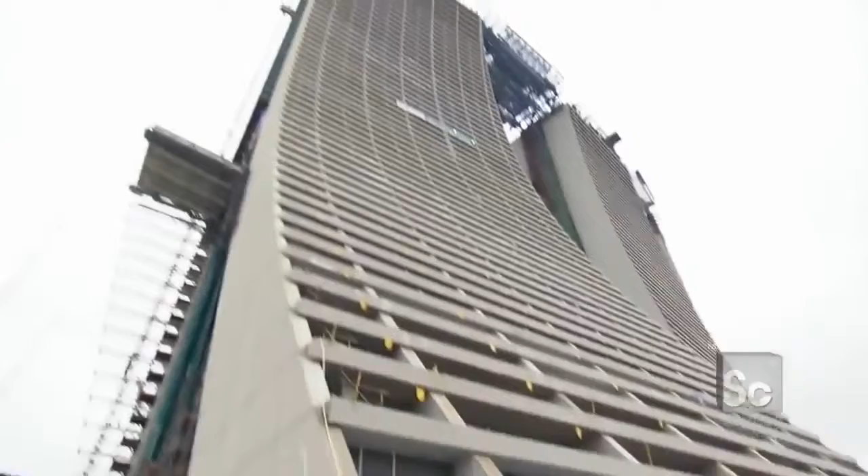actually paint their buildings. So today, I'm going to do something that you would never see on an American construction site. I'm going to paint the skyscraper. Crews will have to paint an area about the size of Mount Rushmore. Muti, I'm Danny. This is going to be one of the single largest paint jobs ever attempted.

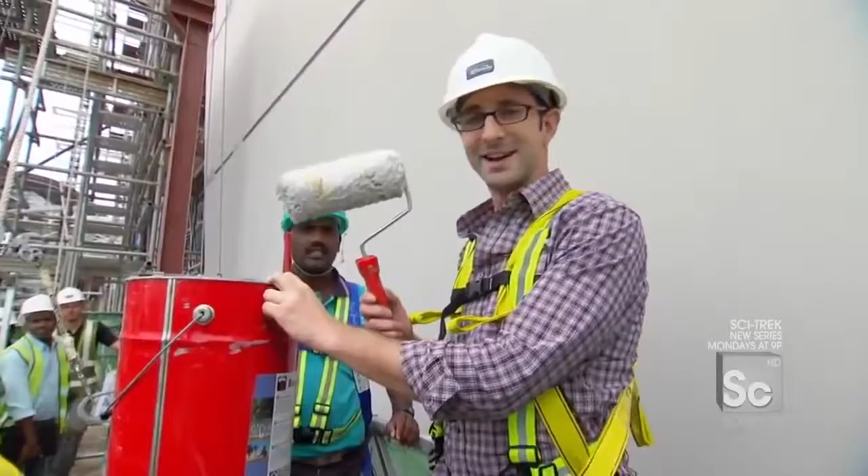So I got a bucket of paint, and in order to apply the sophisticated skim coat, the technology we're going to use is a paintbrush. Really, Muti? Yeah, this brush. It's a small brush, yeah? Yeah, small brush. One small brush. Right, and obviously you couldn't do a skyscraper with that little brush. That'd be crazy. So instead, I have a roller, which ought to really expedite the process. Painting fast. All right, well, what more do you need? Muti, away we go. Okay.

This wall faces the country's main highway, connecting the airport to downtown. So, Muti, you're okay? Heights, no problem? No problem. And on opening day, with all eyes on Singapore, it's gotta look good. Okay, so welcome to House Painting 101, Skyscraper Edition. So we're about 200 or so feet in the air. We've reached our cruising altitude in a super, super robust and technologically sophisticated gondola system.

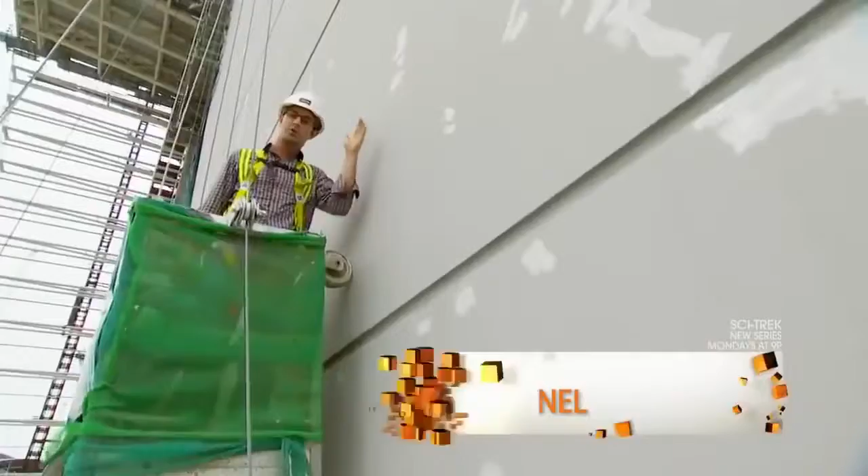And what we have to do is fix this. This wall is a mess, right? Little holes they've patched and filled. We have to have one smooth surface ready to be seen by all of Singapore. Muti, start with the dark gray first, huh? Okay, first. I'm gonna paint within the lines here. The dark gray lines mark each floor of the tower, so you can still see the floor-to-floor separation from afar, giving a sense of scale to this massive surface.

Okay, so now that the gray line has been deepened and darkened, we're gonna start painting the building. So Muti, go to it, huh? All right. Nice and gray. I like that Muti's looking over like I'm touching up the top of the Sistine Chapel or something. In total, Muti and the rest of the crew will use more than 2,200 gallons of paint. Muti, how's it look? Does it look good? Yeah, very nice. Good. Muti's loving it. To cover all the tower shear walls in time for opening day.

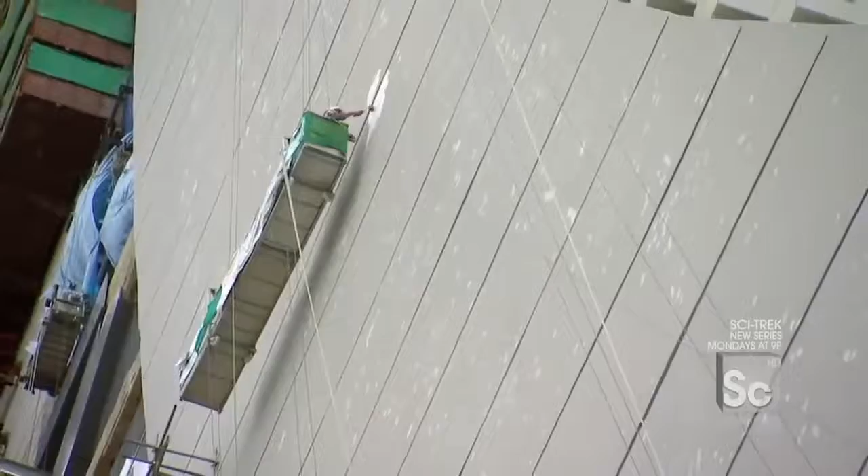And this project cannot afford delays. Because every month the casino is not open, developers give up $100 million in lost revenue. So these crews have been running at top speed since day one. So, John, just to put this in perspective, it would take perhaps another country a project this big, this expensive, this complex, as much as 6+ years to build. Yeah. And you guys are on target to complete this in 3 years, half the time.

Yeah. And one of the critical aspects of this project at the moment is getting that Sky Park structure up. So getting the superstructure of that Sky Park done is key to closing up this project and finishing this race. But this is going to be a sprint to the finish. Because crews up at the top of the Sky Park have only 6 months left to turn this mess of steel into the world's longest elevated pool deck.

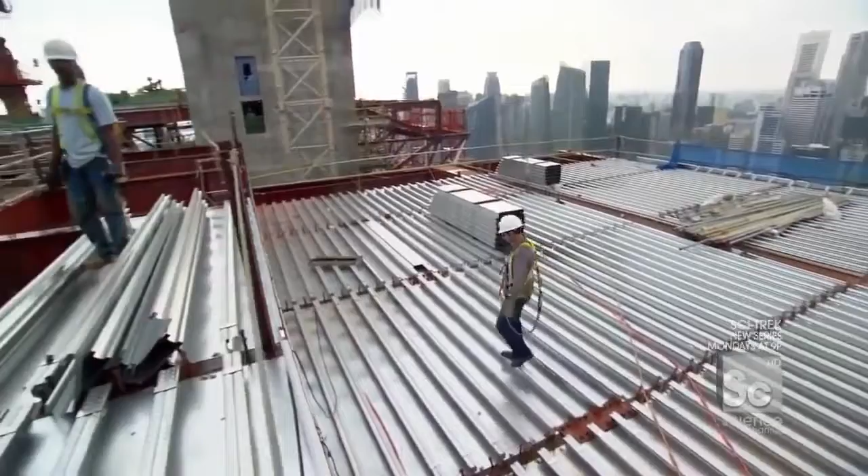This is it. This will be the pool deck, and that will be the pool. But there's a problem. I mean, there's a pretty big problem. You go on vacation, you come to the Sky Park, you see this amazing view of Singapore, and then you fall through a hole to your death.

It's not good. Not good fun on the vacation. So Wilson and I are going to cover it with this aluminum decking. Cover the holes? Can. Let's cover the holes, my friend. We're filling in the bridge segments between towers 1 and 2, more than 650 feet up. And there is literally nothing below us but the decking we're about to lay.

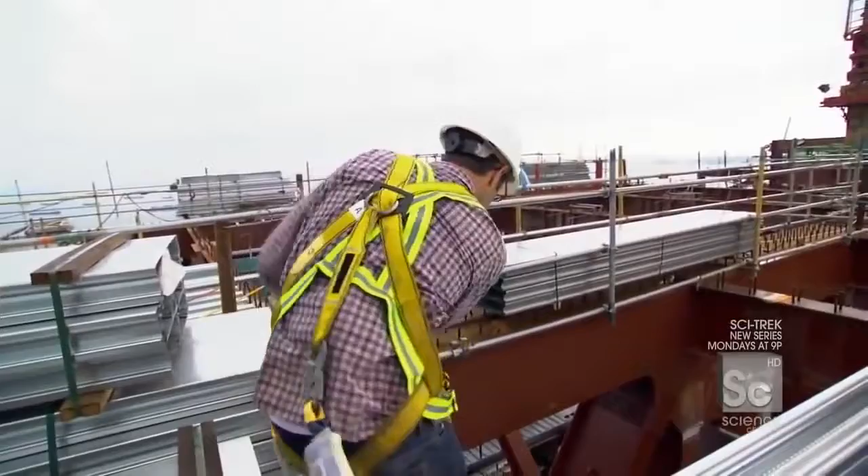Oh, I just got that thing. That thing, I just looked down and I saw a car, and it was so little. And my body was like, wait a minute, what are you doing up there?

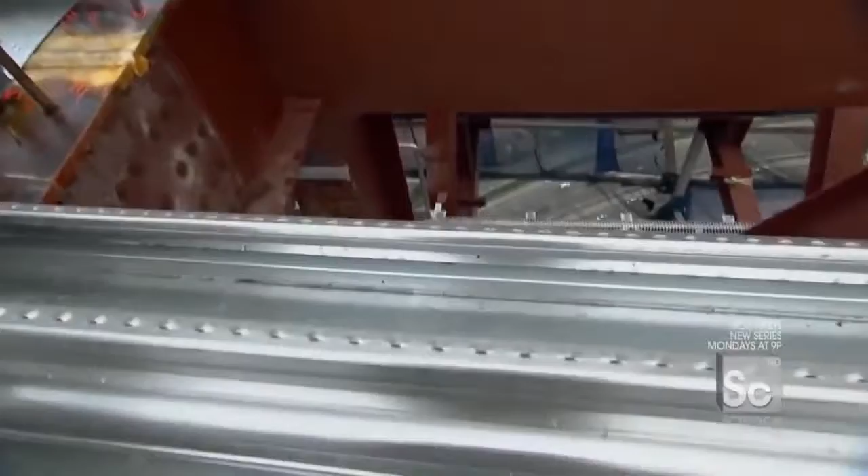All right, Wilson, how do we begin? Step 1? Yeah, step 1. Okay, you ready? 1, 2, 3. Okay. And slug in. Yep. Pull back. Pull back. Okay. Good. Put the clip. Put the clip on. Nice. Wilson, next piece. Plugging up the hole. Dear God. Okay, letting go.

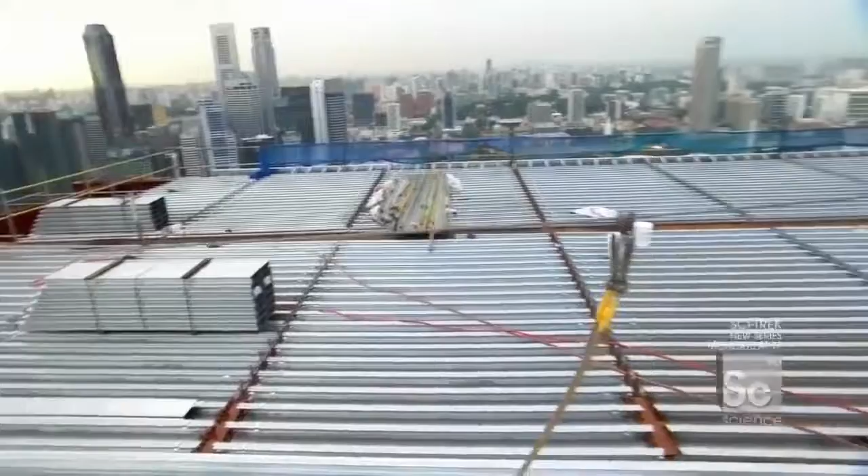Woo! With these 10 panels in place, another 125 square foot section of this Sky Park deck is complete. Last piece, huh? 3. Wilson, victory! Wilson and the rest of the crew will have to lay down 300 panels a day in order to have the entire Sky Park ready for opening day.

Wilson. Yes. When the Sky Park is done, people will be swimming right there. Correct. Dancing on that cantilever. Yes. Having dinner in that restaurant. Yes. But we're not done yet, are we? Yeah. Come back in 6 months, check out this Sky Park. Me and Wilson will be having a cocktail and enjoying this ridiculous, incredible view.

You're buying though, right? Yeah, correct. All right, cool. Wilson's buying, so it's all good.

When the Sky Park is complete and the Marina Bay Sands opens, Singapore will join the ranks of the world's top gaming destinations and fulfill a 3-decade-long quest to reinvent a nation.

You know, for me, the moment when a building actually becomes a piece of architecture is when it transcends its function. So what I mean is, think of the Empire State Building. It's not just about the people who work inside of it, but it's really about the spirit of New York City. The Marina Bay Sands is a project with a hotel and a convention center and a casino. But in reality, the sum is greater than the individual parts.

This is a project where an architect, an engineer, an owner, and a government have all come together to literally try and reinvent the face of a nation. And I think if you come back here in about a year's time, that postcard picture you take of Singapore is going to look a lot like that.

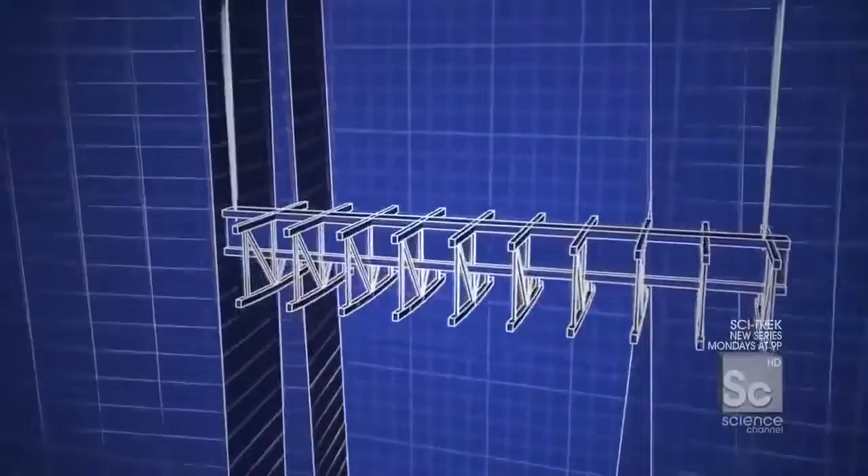Because of the curvature of the towers, this piece must pass within 10 feet of 2 glass skyscrapers on its way up. Any wind over 5 miles per hour is enough to call off the lift. So are we good? Are we ready? Yeah, good. So it's now okay to go. Okay, I'm ready. Typically, crews would use tower cranes for heavy lifts, but this segment far exceeds their capacity.

So instead, engineers are borrowing the technology from a different kind of construction, bridge building. Even the most powerful tower crane can lift about 20 tons. This thing weighs over 350, not an option. So they went with something called a strand jack.

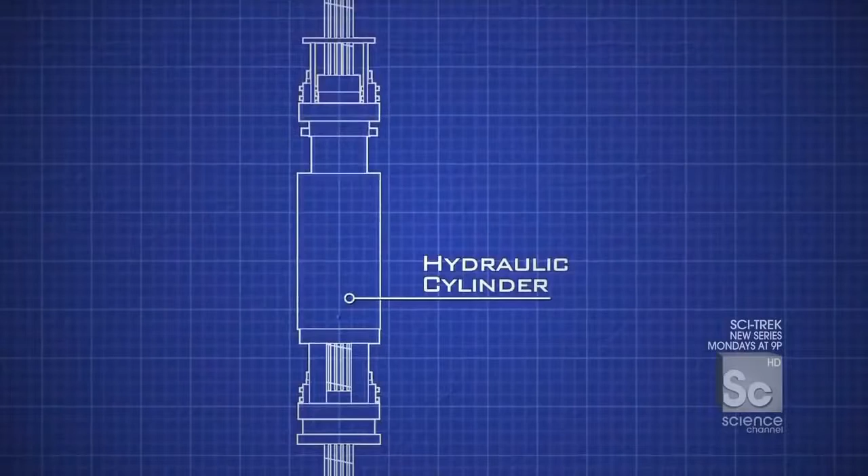And to understand how it works, imagine 2 hands or clamps holding a rope. One hand locks the rope, the other brings the rope up, grabs the rope, goes back for more, brings up more rope, and so on and so forth. Strand jacks work on simple hydraulics. A bundle of 22 half-inch diameter cables passes through 2 clamps. The top clamp grips the strands and moves up tons of steel.

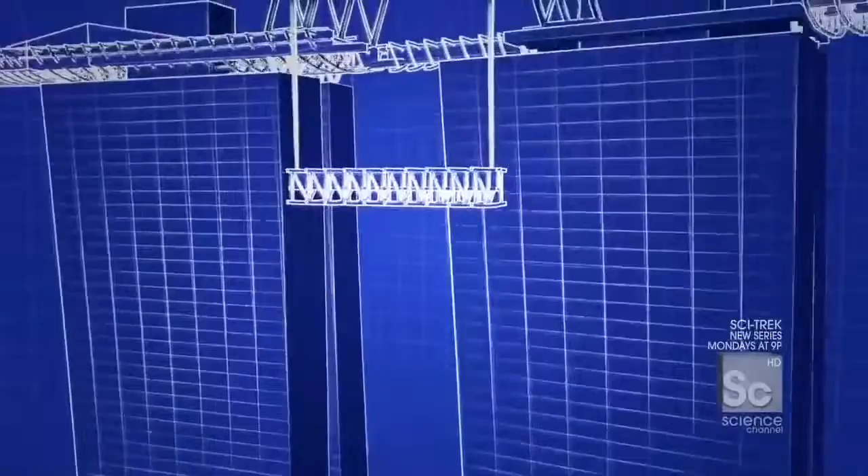It's a little after 7 p.m., and on most job sites, it'd be quitting time, right? Folks would be going home. But here in Singapore, we're about to begin one of the most critical lifts in the entire project. That bridge segment right there, an over 350-ton chunk of steel, is about to get lifted up over 650 feet in the air.

I mean, in principle, this sounds crazy, right? Yes. We're actually taking a bridge, lifting it up, and putting it on top of 2 skyscrapers. Yes. This has never been done. Never done. So you got to be a little bit nervous to get this thing up. Oh, definitely. We have to get it right. Lifting this piece will take some of the strongest hoisting cables ever designed. Going up? All right, Solomon, up here? Yep. They get attached to the very top of the segment.

I'm in Singapore, a tiny island nation with less than 5 million residents. In fact, the entire country is smaller than all of New York City. Located at the southern tip of the Malay Peninsula in Southeast Asia, the main island of Singapore is both a city and a country, one of the most densely populated in the world. Culturally speaking, it's a somewhat strict and buttoned-up environment. Chewing gum? Against the law. Insensitive behavior is punishable by fine. And if you're caught vandalizing a building, you quite literally get hit with a stick.

But despite this conservative cultural backdrop, Singapore is attempting to reinvent its image by doing something totally surprising. They're going to open a massive casino. With no natural resources of its own, Singapore is risking $5.5 billion in hopes of cashing in on the gambling boom exploding across Asia. It's a pretty significant gamble because for Singapore, we've never had gaming before at this scale. We've never had a resort at this scale. Yes. You're taking a major leap. Yes, it's certainly a transformational project for Singapore. Where you hope to not just double, but triple the tourism receipts. That's big.